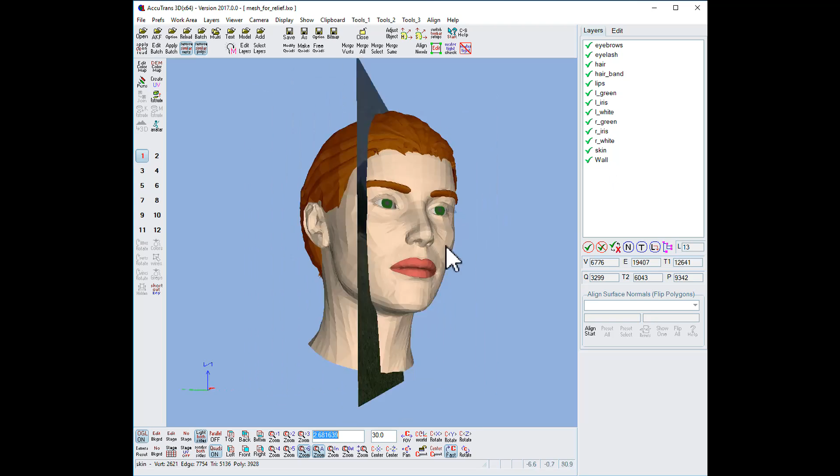You can assemble a group of meshes in your favorite 3D modeling program, or you could assemble the meshes in AccuTrans. The model I'm using here has 13 layers, and if I rotate around we can see we've got a full head with our wall going through it, which is textured. The colors and the UV texture on the mesh aren't necessary because they won't take any part in this process.

And you can see the model doesn't look very smooth because we're looking at flat rendering, and this is what is going to be translated into our final model. If you have some smoothing put on, such as vertex normals, which I'll calculate here, you can see the model's face now looks much smoother, but that won't transfer through to the sculpture relief.

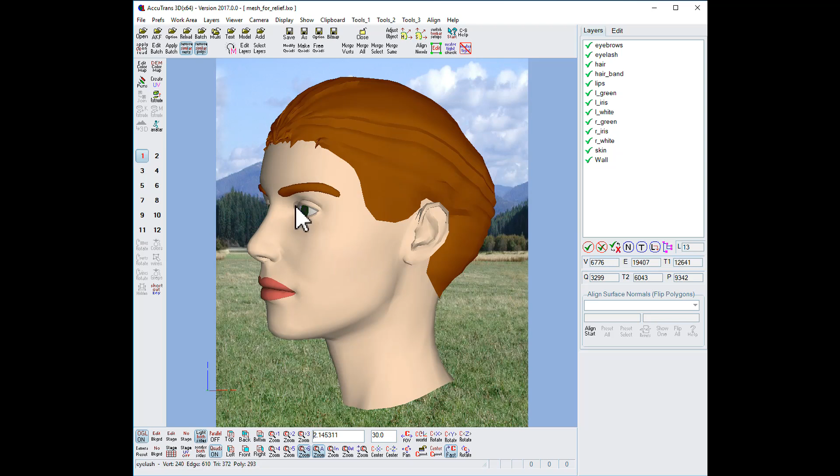Now we have two things with this model which would cause problems. One is our semi-transparent eyelashes, which will look terrible when converted. We don't want that to take part in our conversion, so I'll just turn that layer off.

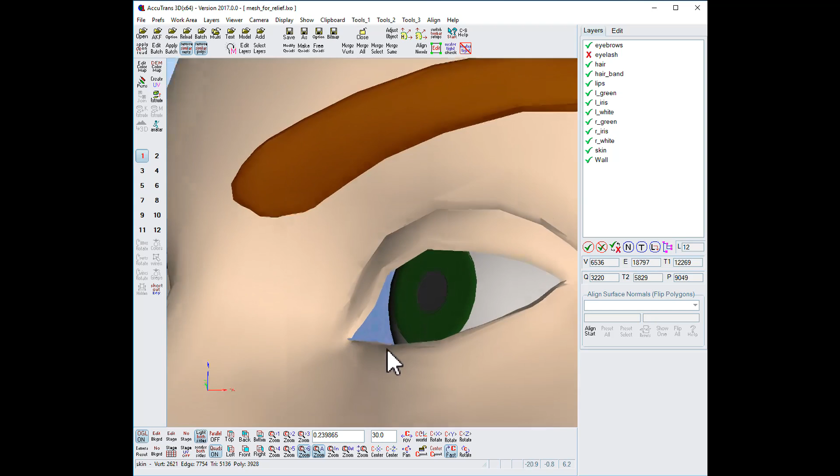And now if you look at this area here, as I rotate the model, you can see it moves around and it changes, and we're seeing the textured plane behind. This is a hole which should be filled up before we do the conversion, but I'll just leave it this way so that you can see what happens.

And now I'll just reset the camera, and the model can be made of both quads and triangles, which these two edit boxes show us here. It could be all triangles, or it could be all quads. And now the digital probe will take measurements along the ground plane. In AccuTrans, that is the X and Y axis.

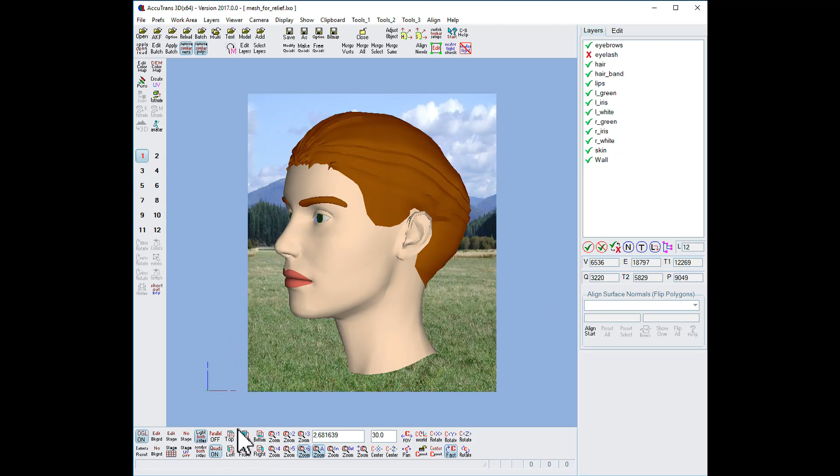And if I click the top view and we look down on the top, we can see that we would produce a new mesh of the top of the head, which isn't what we want. So what we have to do is rotate the model into the right orientation. So I'll click on the Adjust Object button, and that puts in a new group of controls here.

We have the location of where the model is in the world, and it can be any place in the world. And now we want to rotate it. So we can either rotate around the midpoint or rotate around the origin. For what we're doing now, it doesn't matter which of these two I use, and I want to do a -90 rotation on the x-axis.

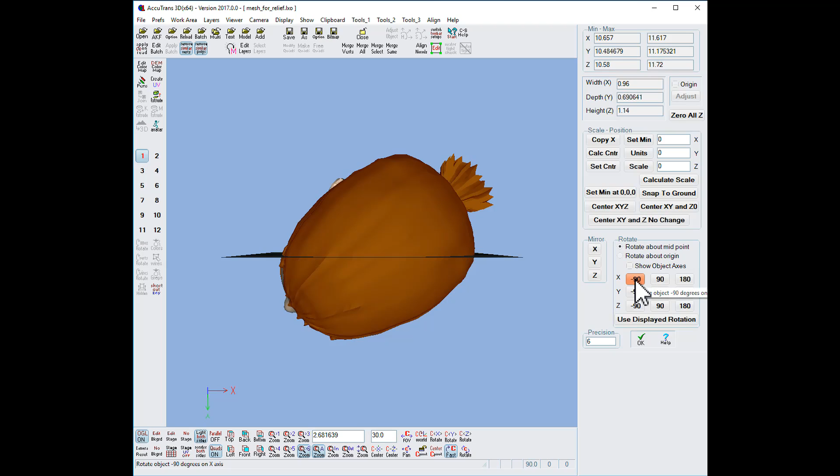So I'll do that, and now as we're still in the top view, we can see what the digital probe is going to see. And if I click on the front view, you can see now the orientation looks different than we saw before. The nose of the model is pointing up, so we're going to get the right view.

And so I'll click OK here, and now at this point, any adjustments you've made to the model, you might want to save to another file in case something goes wrong later on and you want to revert back to this stage of the process.

But what I'm going to do is go to the clipboard, copy layers to the clipboard, then select another work area, and do clipboard, paste layers from clipboard, and now I have my model plus the original one. And the eyelash layer is now gone because since it was turned off, it didn't get copied over.

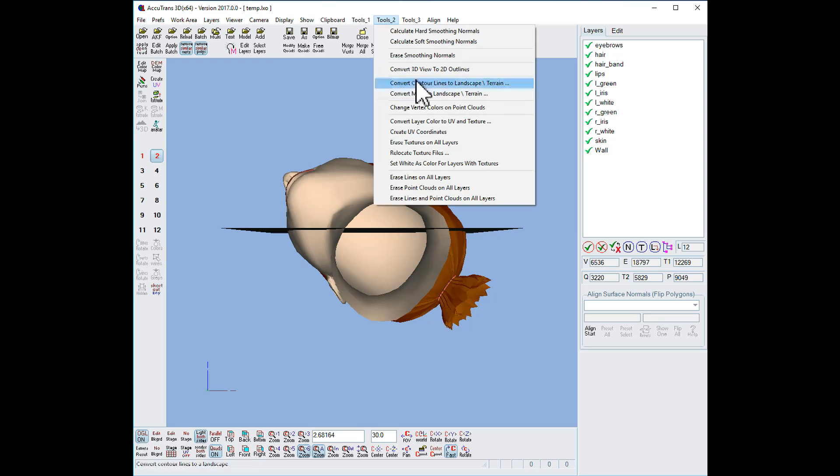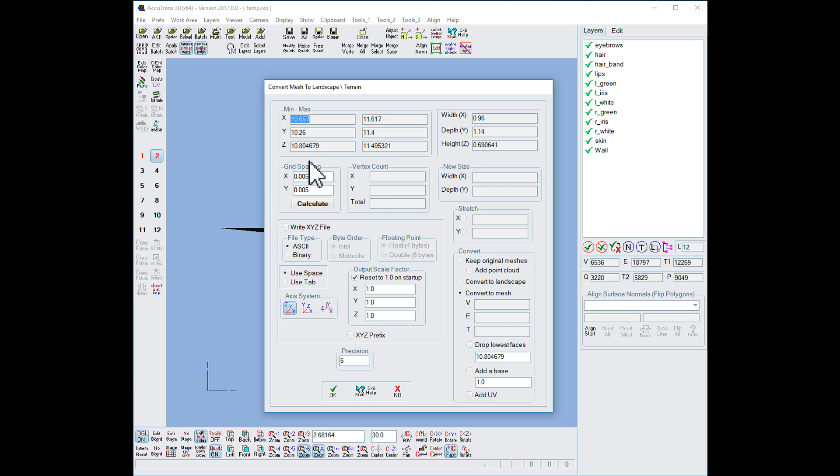So now to activate the digital probe, I go to Tools, Convert Mesh to Landscape Terrain. The digital probe works as though you were pushing a wire screen down onto the model, and where the wires and the model touch together is where a vertex will be created. And the closer together you put the vertices, the more detail you will get from the original model. Plus, you will get more triangles in the final model.

So for this model, I'm going to use a grid spacing of 0.005, and I calculate to see how many vertices I've got, and there's going to be 44,197, which is going to result in 87,552 triangles.

I don't want to drop any lowest faces, I don't want to add a base, and I don't want to add UV coordinates. I could also convert to a landscape as another option. And so what I'm going to do is click OK, and we now have our model.

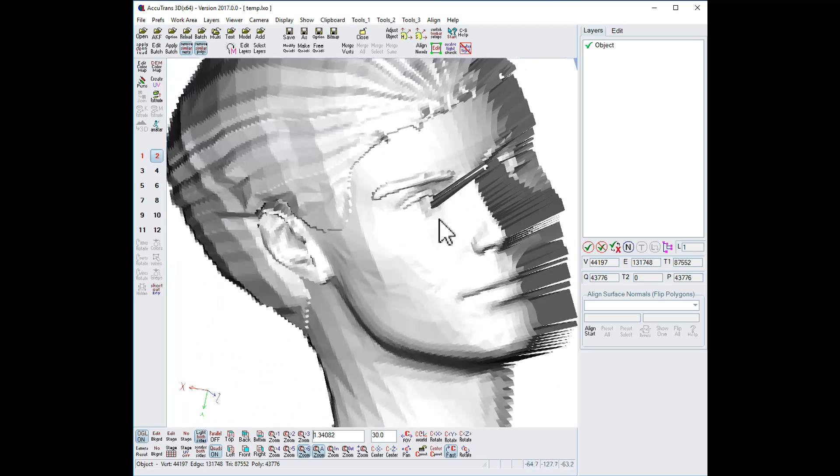And if I rotate it around, you'll see that down here you can see from that hole that was there, the digital probe went, and it went down till it hit the plane, and that's what it made the bottom of the thing. So you want to close any holes in your mesh before you do this part of the terrain.

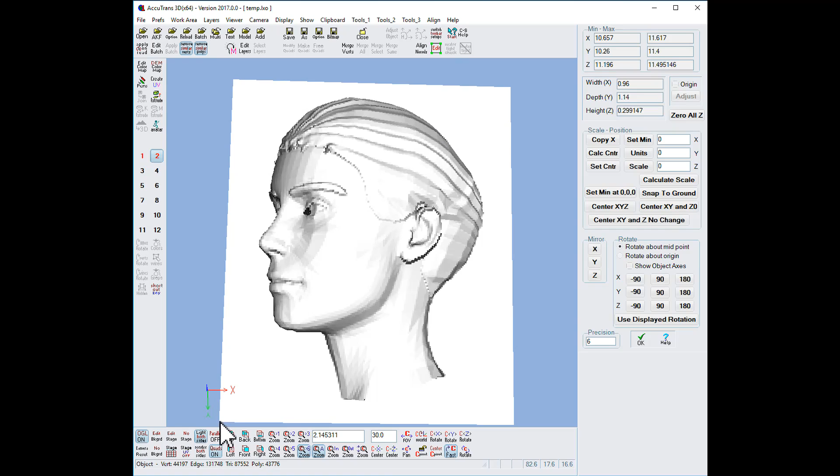Now that we have our mesh, we can go back to Adjust Object, and now we want to scale and position the model to go for the CNC machining. So now we want the bottom left corner of the mesh to be at the origin. So I'll click this button, Set Minimum at 0,0,0, and that's where our position is there now.

And so now this is the size we have of the model. But we'll say, okay, I want the model to be 2 feet and 3 inches tall, which is 2.25 units. Now, AccuTrans has a unitless system of measurement, which means a unit can be anything you want it to be.

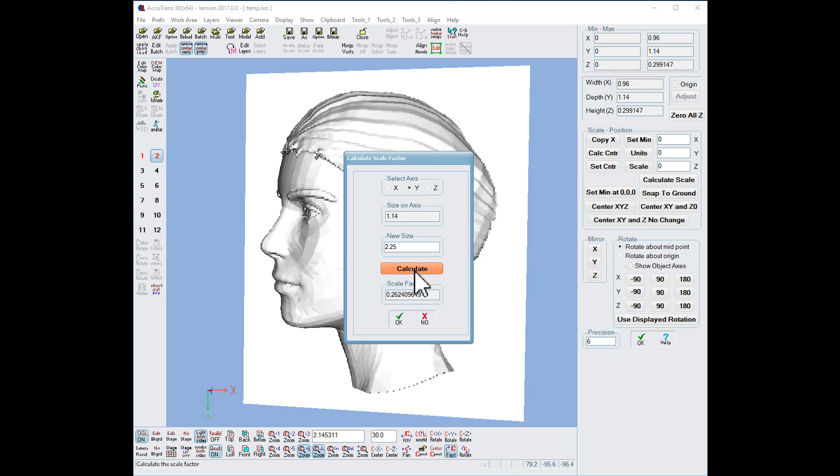So what I'm going to do here is I'm going to click Calculate Scale. I'm going to select the y-axis because this is the height. I want this height to be 2.25 feet. So I'll put my new size 2.25 feet. So I put 2.25 feet in there, hit Calculate. I have the scale factor, click OK. The values are entered here. I click Scale, and my model now measures 2.25 feet on the y-axis.

But now the company where I'm going to have the CNC machining done, their software is expecting to see the dimensions in millimeters, and I'm in feet now. So I've got to rescale the model again, so I'll click on Units. I go here to Import Units. I select feet because that's what the model is in now.

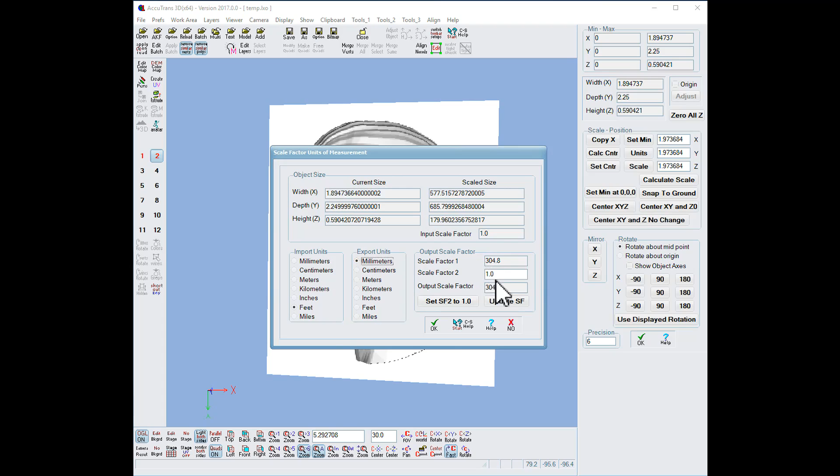It's set to meters, but I don't want meters, I want millimeters. And that gives me another scale factor to go from feet to millimeters. I could put in a second scale factor if I wanted, but I'll leave it at 1, and I'll click OK, and that number gets entered here. I click Scale, and now I've got the size of my model in millimeters.

And so now for CNC machining, the software used there to cut the tool path usually accepts both DXF and stereolithography files. So I'm going to click on the option button, which brings up the Save with Options dialog box. And so I've got my choices of what I want. I'm going to do DXF first. And so now we're set to export to DXF files.

The settings in this flags group apply to every file format. If we go to the output scale factor page, we want the scale factor set at 1 because we've already scaled the model to the right size. And for some file formats, such as DXF, there's a second page, and we want it to be output as 3D face and output tables, blocks, and entities.

So now all I have to do is go click Save. The standard Windows Save As dialog box opens. Select the folder where you want to save, edit the name to what you want, and click the Save button, and our DXF file is now saved.

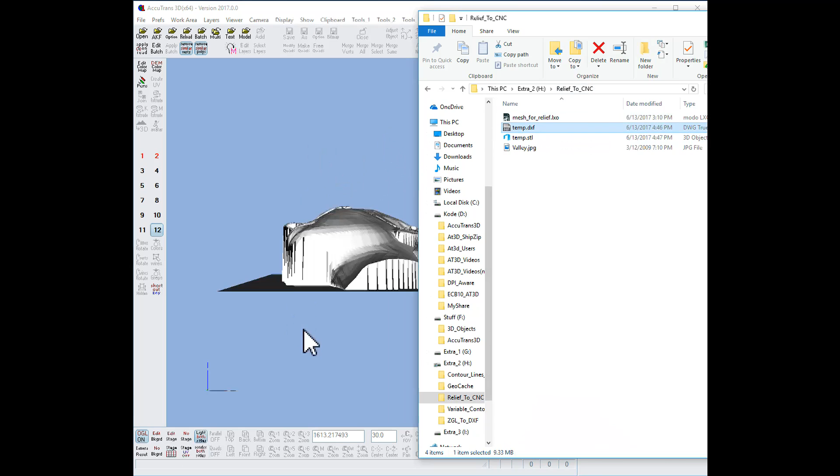And now if I just select another work area down here, and I'll bring up... AccuTrans accepts drag and drop for a lot of file formats. So I just saved the DXF and STL files to my Relief to CNC folder. So all I have to do is drag over the DXF file, and there is the DXF file that we saved.

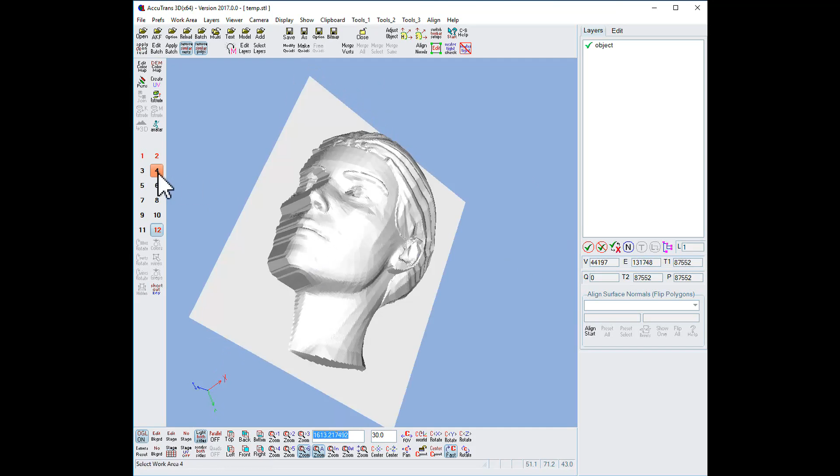I could close that out, bring it back, and this time I'll drag over the STL file, and there's our STL file. Now I'm going to go back and do another paste from clipboard. There's my object that I had before.

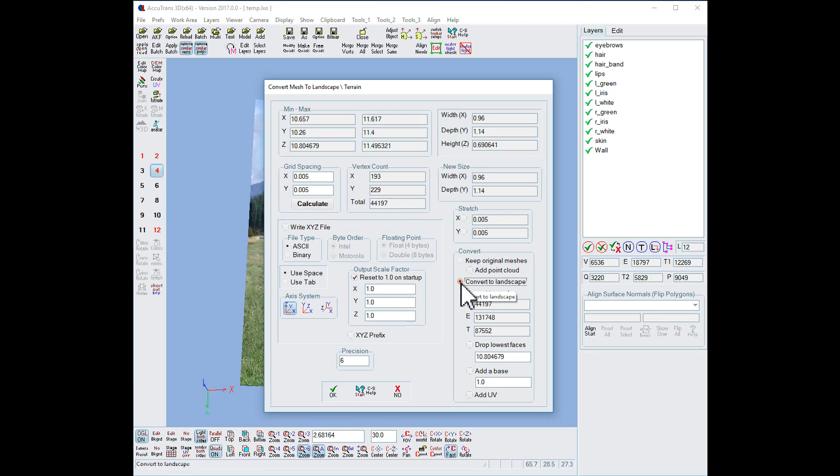This time I'm going to go back to Tools, Convert Mesh to Landscape and Terrain. We've got all our same units, so I'll say Calculate, but this time I'm going to go Convert to Landscape and click OK, and now here's our object as a terrain. And now I can go to convert that terrain.

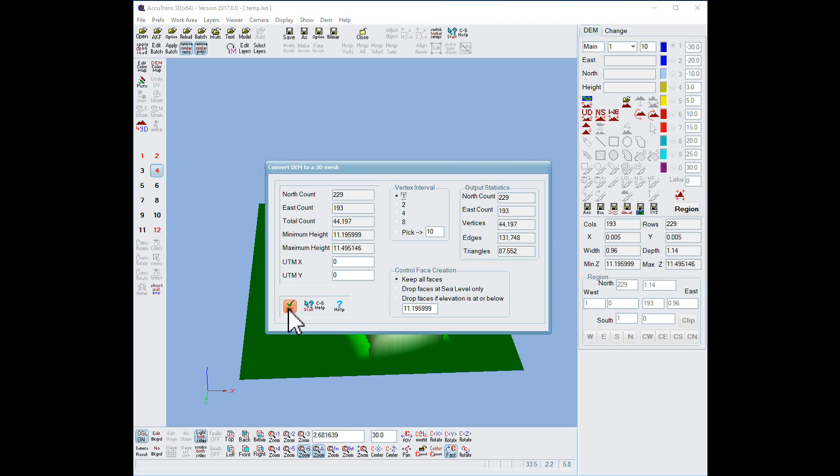I could save directly out to a DXF or STL file, but instead I'm going to export to 3D and keep it in AccuTrans. You can skip vertices; here I'm skipping 8 vertices, only going to that many triangles, but you'll get a much coarser looking model. I'm going to keep all the faces, and I'm going to click OK, and here's our model.

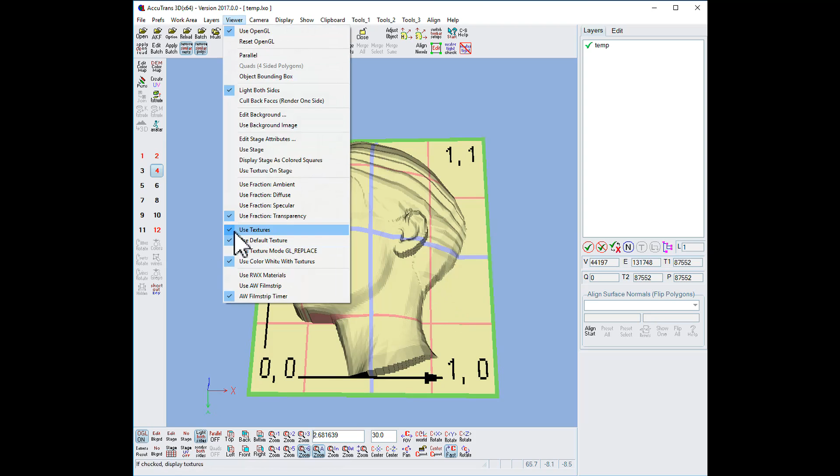UV coordinates were applied to the model, and this is a default texture that is applied by AccuTrans, and I could remove that by going here. It's still UV coordinates, but you're not seeing that funny looking texture. So there's our landscape, there's our model. Looks quite a bit like the other one.

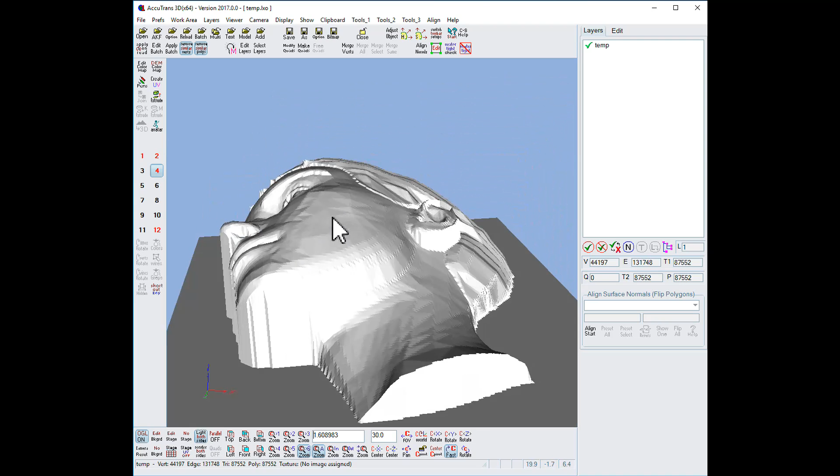Sometimes, depending on the settings you make and so forth, when you go through the landscape terrain, your model could come out looking like it was made out of a whole series of layers which show distinct steps like a set of stairs. But this one came out okay.

Now, if I wanted to go to 3D printing, I could just click on this module. I'm now in the 3D printing module. I put a thickness on. I can either do a normal extrusion or a flat bottom one. I'm going to do a normal one. Click Extrude. Okay, it's extruded.

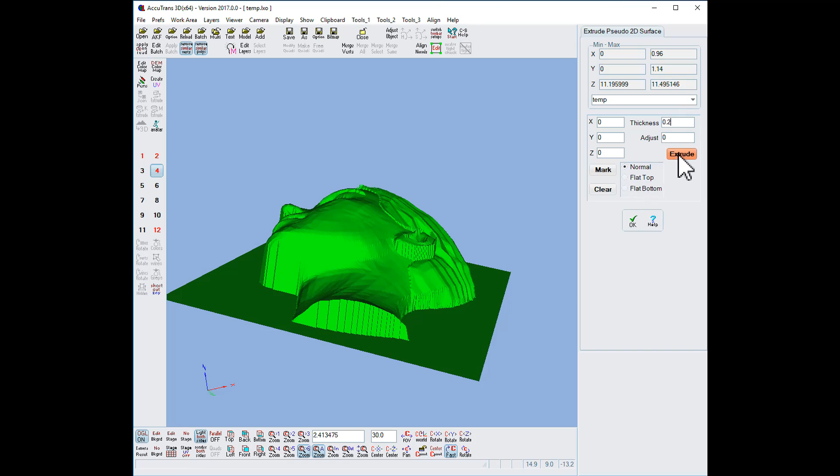I come through, and there you can see what happens with the normal extrusion. Click OK, and if I do a watertight check, it's all watertight. It's ready to go. Now that's one way of getting there.

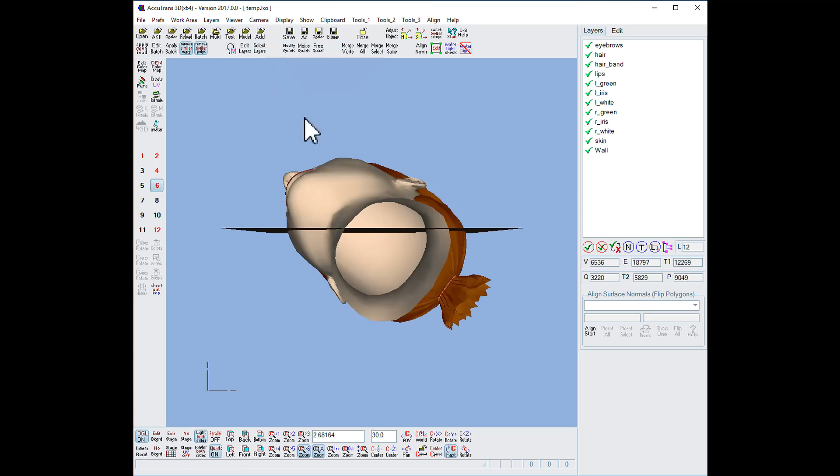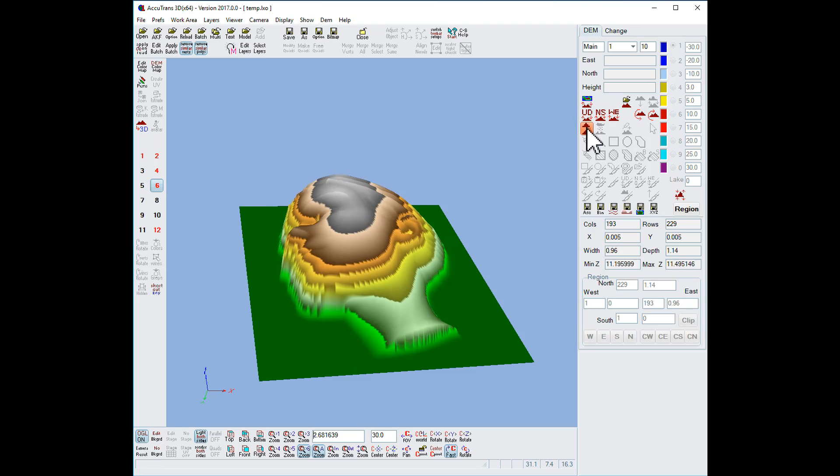Now I could also go back, paste from a layer, go back to the convert mesh to landscape, do the calculate, OK, here we're back in. Now, if you wanted to do some eroding of the cliffs, you could go to this control here, which is smooth cliffs, and I'm going to click it twice, and then convert to 3D.

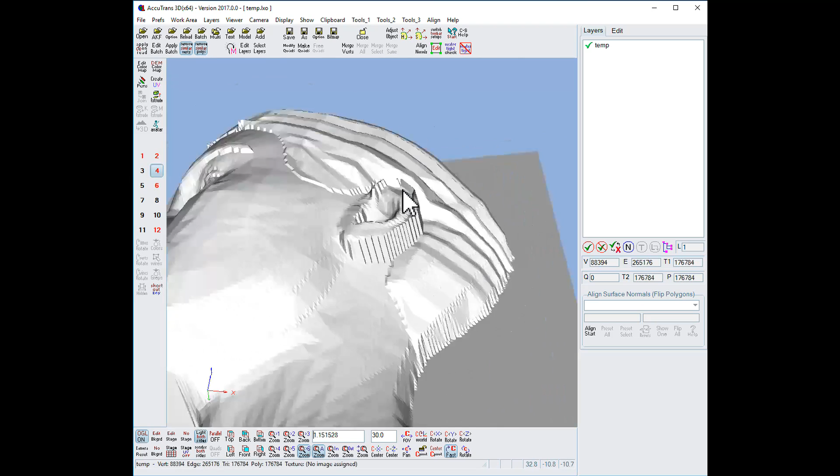And now we can go down. If we look at the ear, you can see it's changed shape in there, and it's smoothed out more than our original model, which was this one. And if we come over here, you can see the ears are more stepped looking. So that's another option you have.

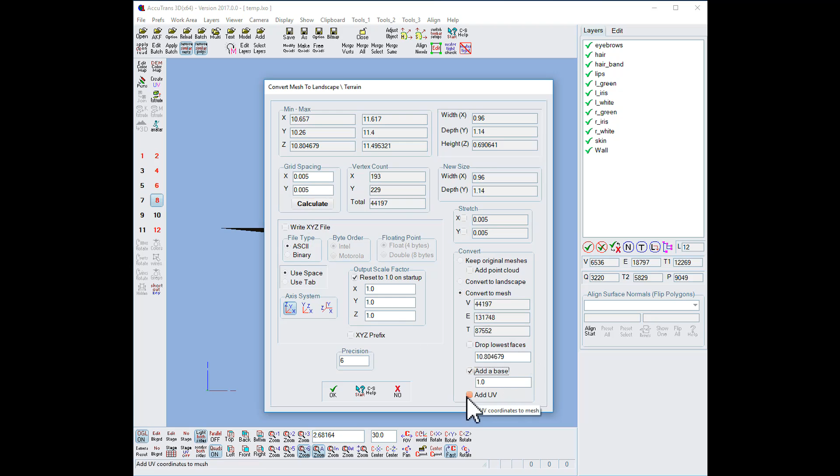And there's one more option we have. We can again paste our model back from the clipboard, go to convert mesh, and this time I'll do the calculate. I'll go to convert mesh here. I'll add a base on it. I'm going to leave it at the 1 thickness. I could put UV coordinates on if I wanted, and then I'll click OK.

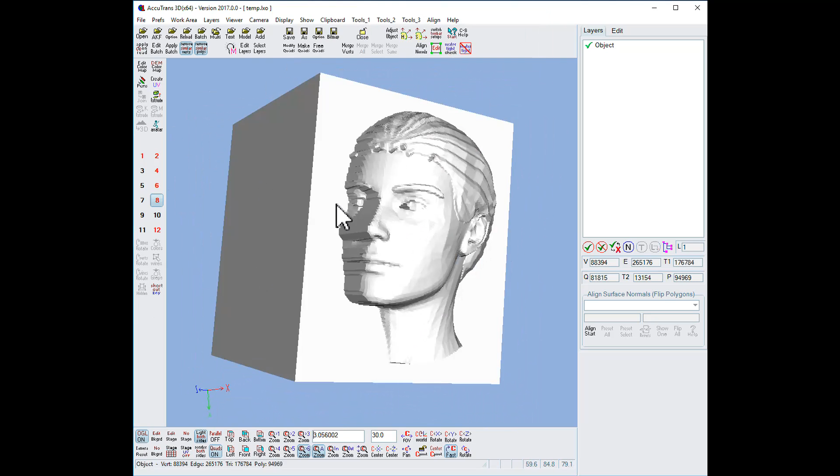It's calculated, and now we've got a big block with our face on it. And if I do a watertight check, there it is. It's all ready for 3D printing. Well, we would have to go and scale the model to the right size. And we'll just go back there.

And there's one thing. Sometimes when you've got the model up, I'll pick the front view, it's oriented like this. Because there are 3 different coordinate systems in popular use, when you take the STL file or the DXF file in, you might find that the model isn't oriented this way in the front view.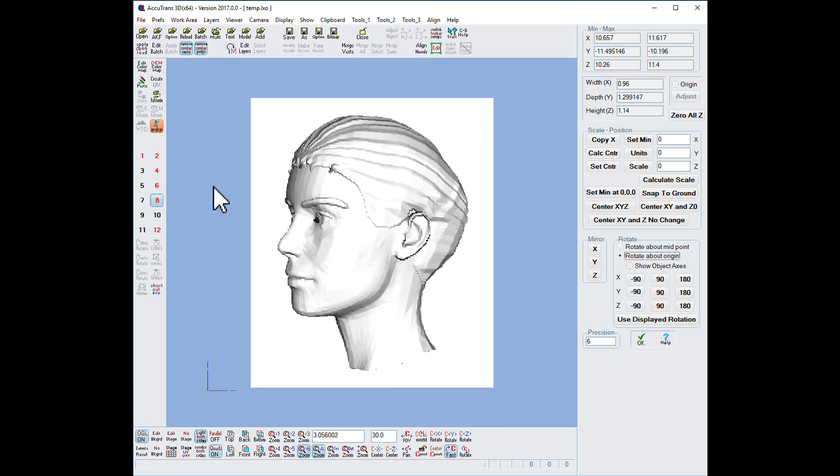So to fix that up, before you export, select rotate about origin, and then do either a -90 or a +90 rotation around the x-axis. You'll just have to run a test to find out what you need. If I did say a +90, it comes like this, and then I'd go ahead and export it to the STL file, and then it would come in oriented like so.

So that completes this tutorial.